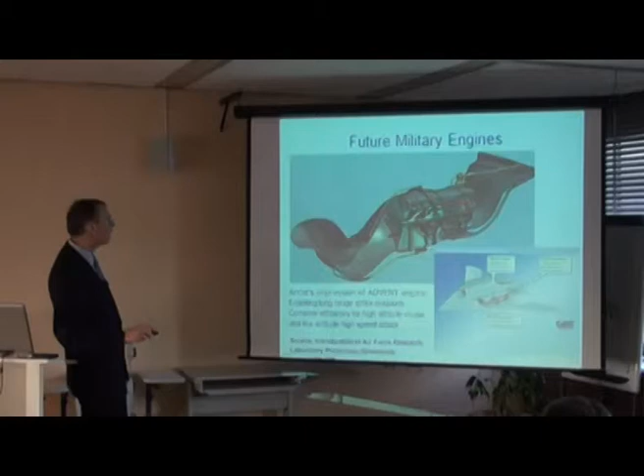Well, the current military engines have their full focus on best performance and thrust to weight. Currently, we are really running at the physical limits of those engines.

That means we have aerodynamics that's always close to separation. We have thermodynamic cycles that run close both to the thermodynamic possibilities and to material capability. You can't go any higher with current available materials.

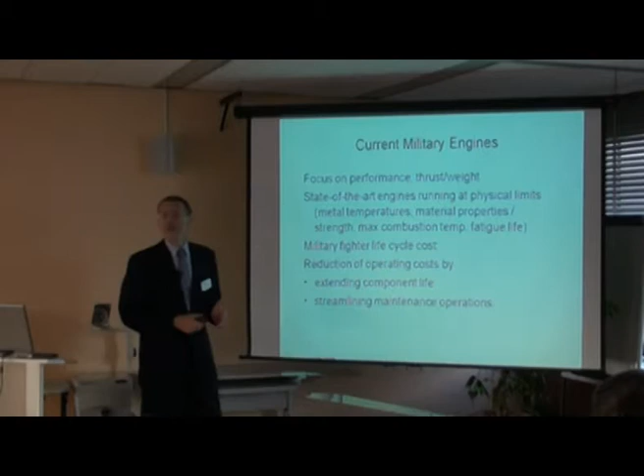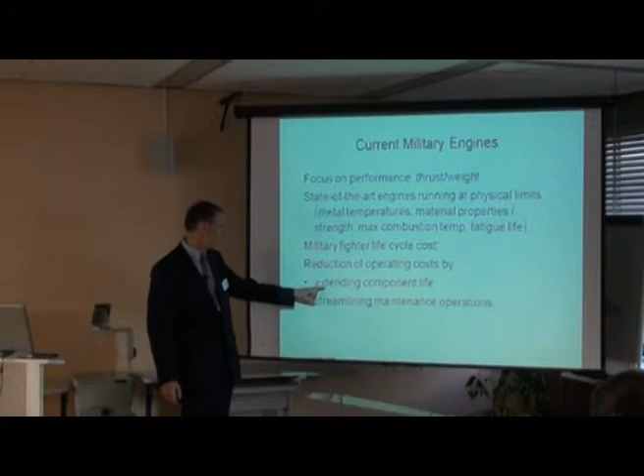Also, fatigue life is a concern. Some of the materials simply don't have sufficient life if we go to still higher temperatures. And of course, you have this concern of life cycle cost. So you want to extend component life, and you want to have maintainability with a low number of personnel.

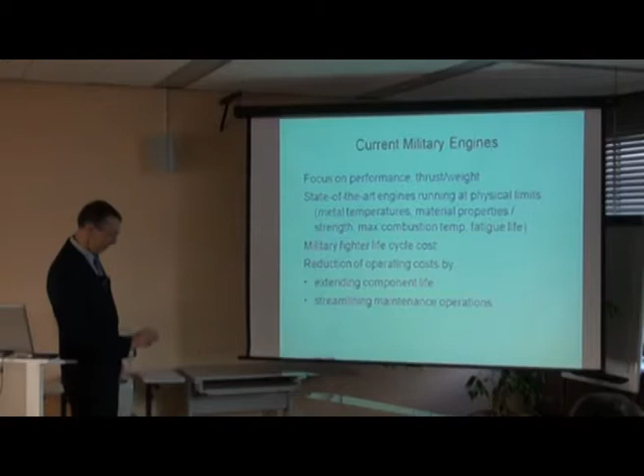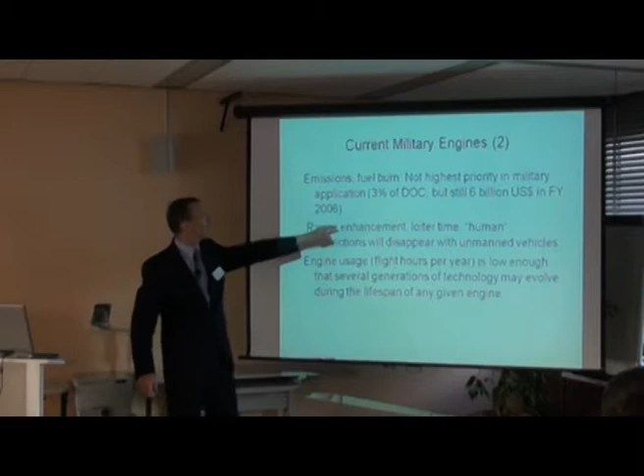Fuel burn and emissions haven't been the highest priority in past development of military engines. Just from the cost side, there are numbers for all US flight operations, including Air Force and Navy. It's only 3% of the direct operating cost, but that's still $6 billion per year. That's the fuel burn of military engines.

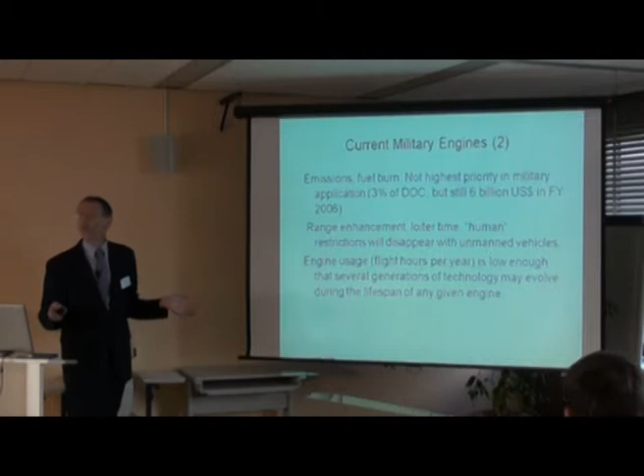And now, with the target of having something like global force projection, you want to have an aircraft, or an uninhabited aircraft, that can go everywhere in the world. And if there is no pilot in this aircraft, then all the restrictions posed by the human pilot can be removed. Your electronics have to survive, but not the pilot.

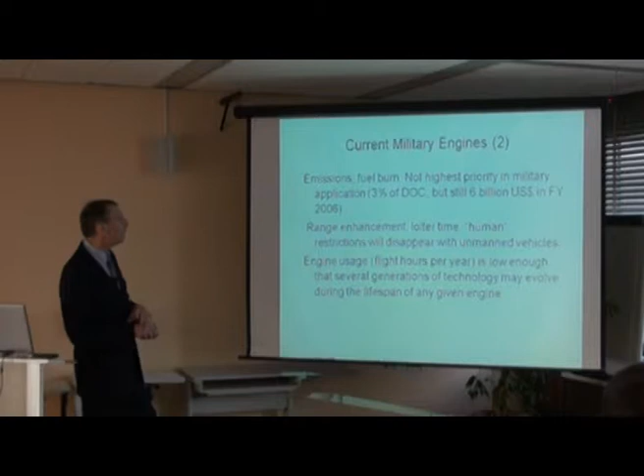And what will happen? You have this high-tech asset, but typically you will use it only a small time of the year. So the total life of the thing will go up to 40 or 50 years.

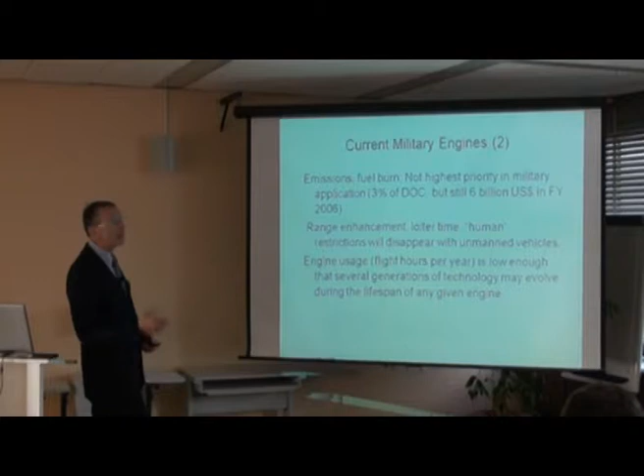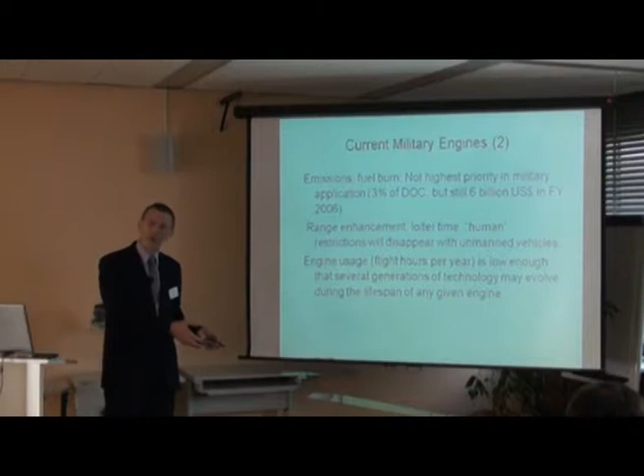And that means technology cannot be inserted at an easy path. So you have to find a technology that's upgradable somehow. There might be midlife updates in such an engine. It might be that you cannot use the latest and best technology just now, but you might consider inserting it in 10 or 20 years from now.

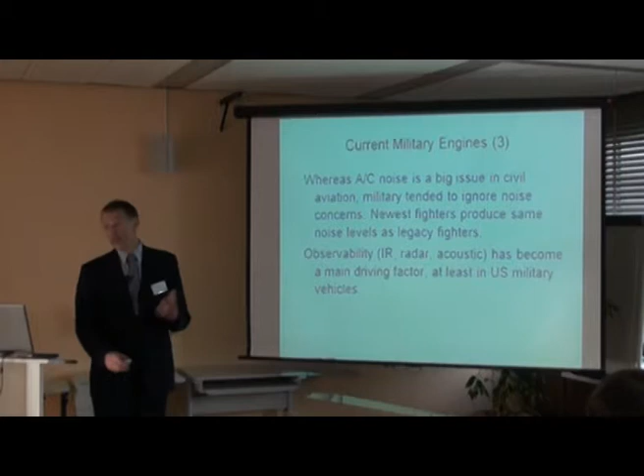Noise is the same - the military didn't put a lot of concerns on noise. They now have some concerns in aircraft carrier operation just due to the health issues of the personnel working there. But the newest fighter still has the same noise level as the ones that had been built 30 years ago.

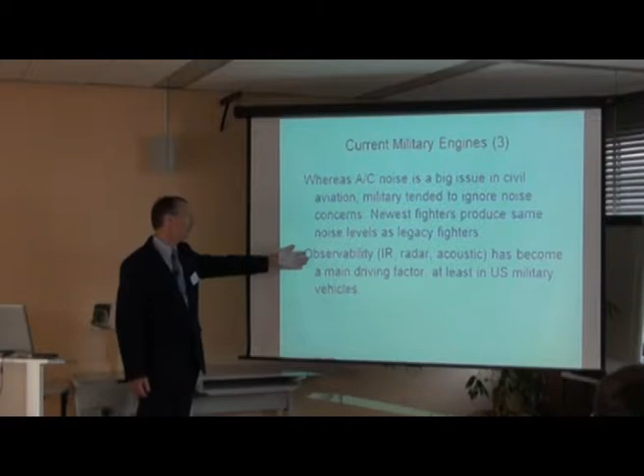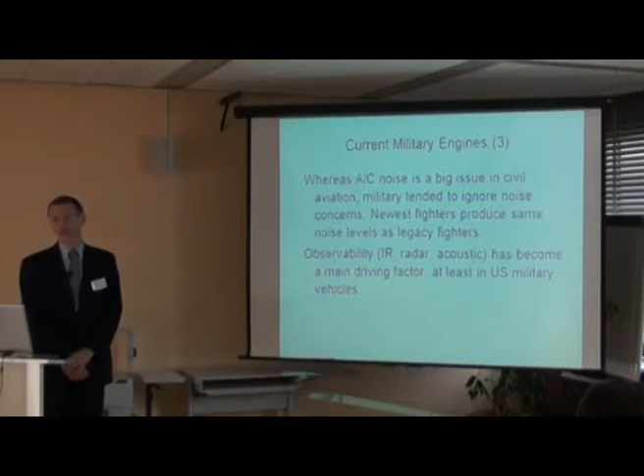And of course the observability issues - IR, radar, acoustic - had been a main driving factor in the design of the current generation of aircraft and engine, and perhaps it will continue to be. As said, if we have usage times of 40 or even 50 years, we have to find a way to handle obsolescence. In electronics, it's quite a big concern.

Of course, in a new engine, during the first years, the only thing that counts is acquisition cost. And some technologies simply might not make its way into an aircraft or into an engine because nobody wants to pay for it, or the taxpayer will not pay for it.

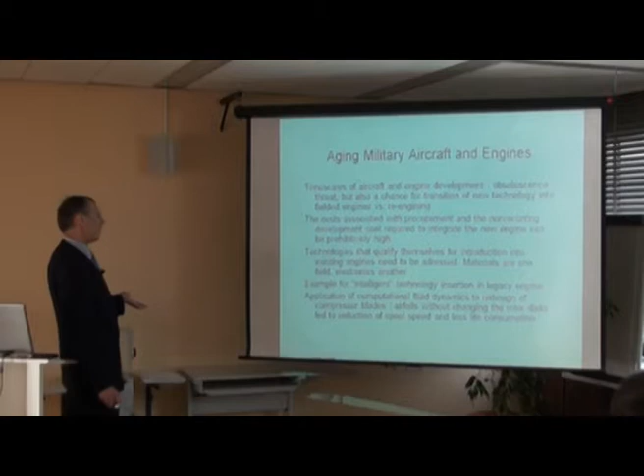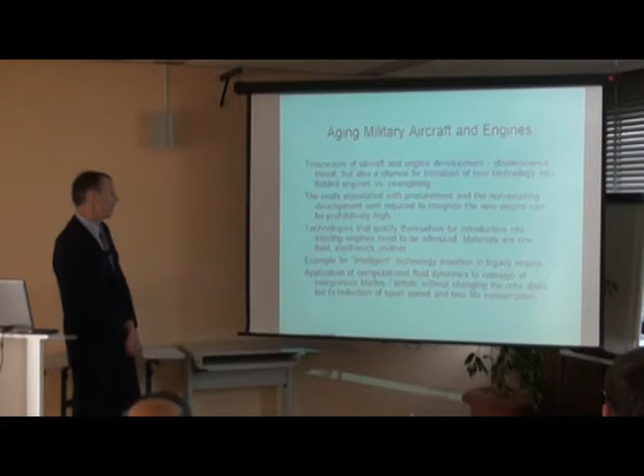Big areas where new technologies go in are materials, and electronics is another field. And we still now have research programs where we're looking at what we can do to existing engines to improve their performance and make them usable for another 10, 15, or 20 years.

I had an example where now you can redesign compressor blades that had been designed in the 1970s, and with modern fluid dynamics you can make them more efficient, produce higher pressure ratios, and even give them more life.

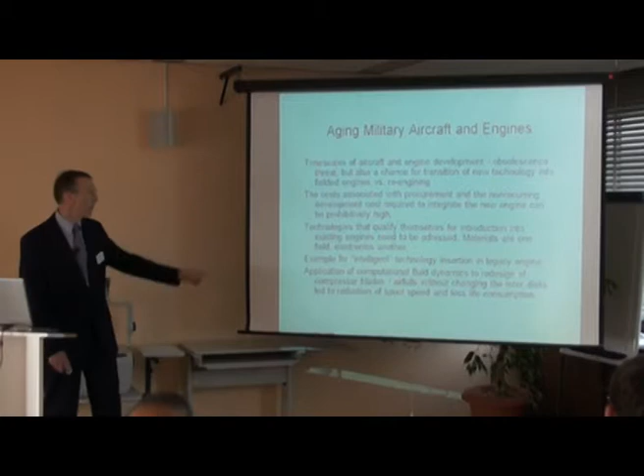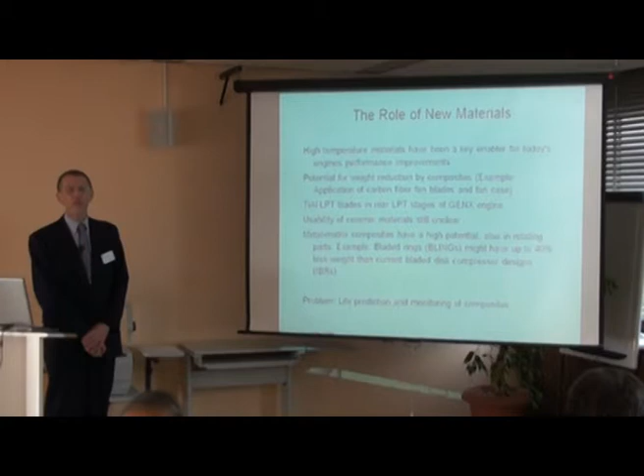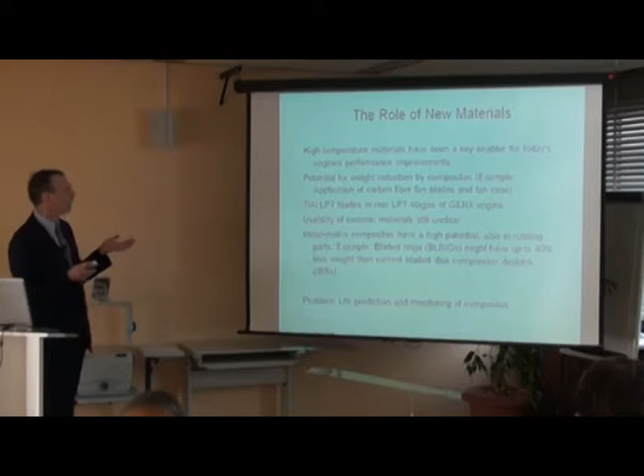New materials had been the main driver of technology in the aircraft engine business. All the new engines wouldn't exist and wouldn't be so efficient as they are now if we wouldn't have all those new materials. High temperature materials were the key enablers for today's engines.

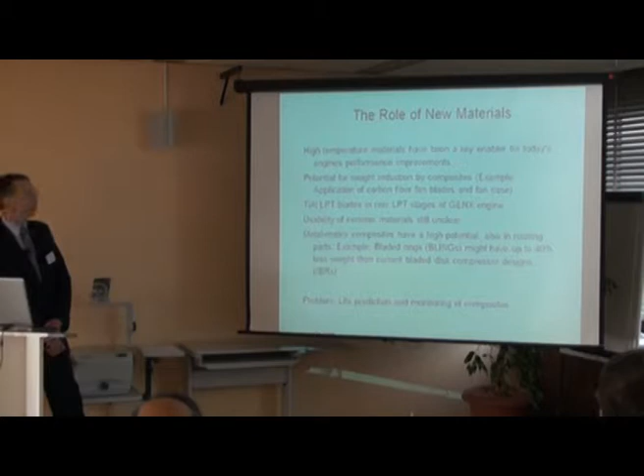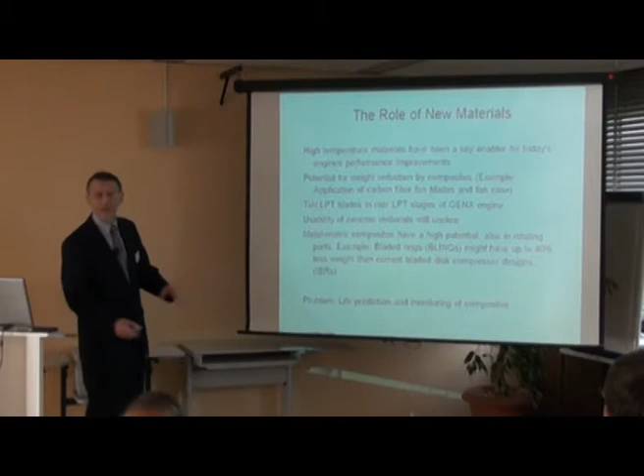There is some potential to do better, but in metallic materials, if we go for composites, in the cold part of the engines, we may have carbon fibers similar to what we now have in fuselages or in wings. There will be new metallic materials like titanium aluminide blades.

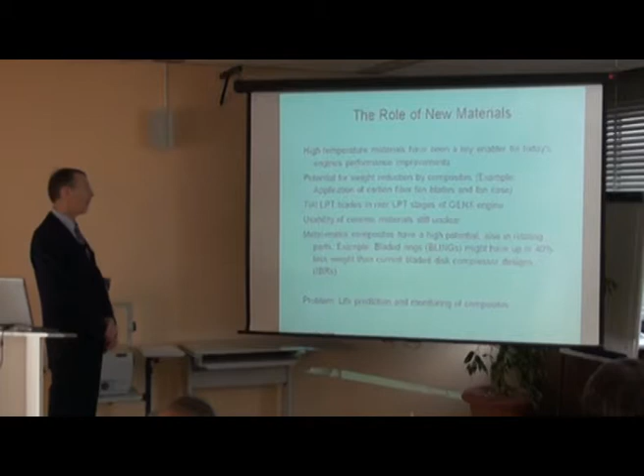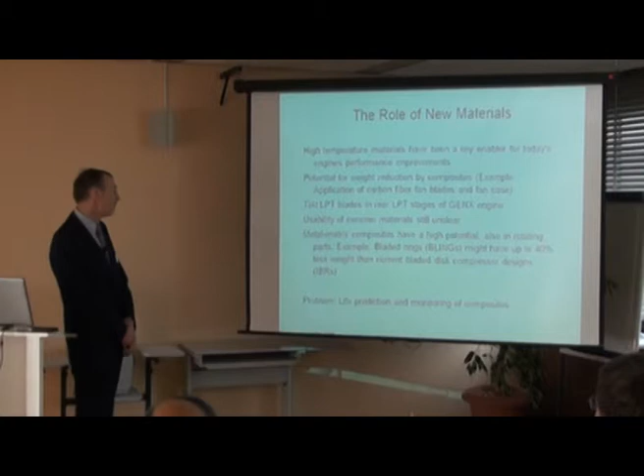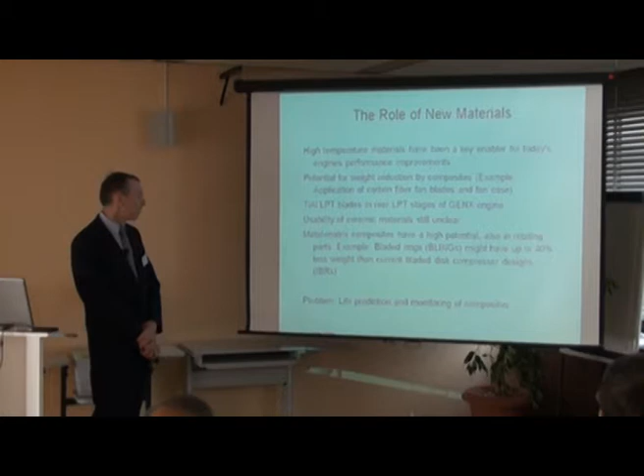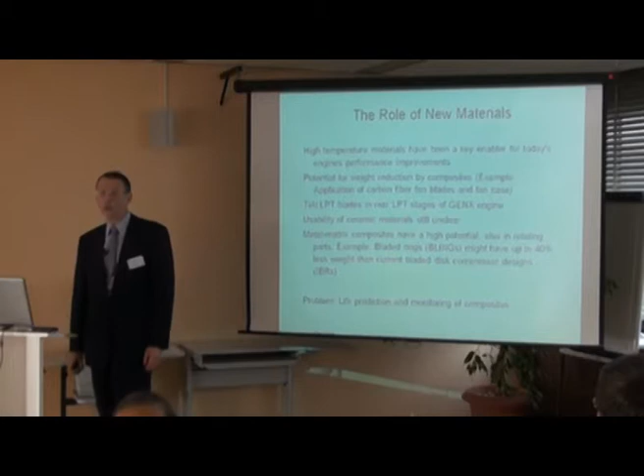Ceramic materials have been around - the idea has been around for decades, but they still didn't make it into a production engine. And we think that metal matrix composites might be one of the new enablers to have lighter weight, to have smaller engines, but there's a lot of technology research still needed. Currently, one of the main problems is it's very, very difficult to predict the life of a composite material.

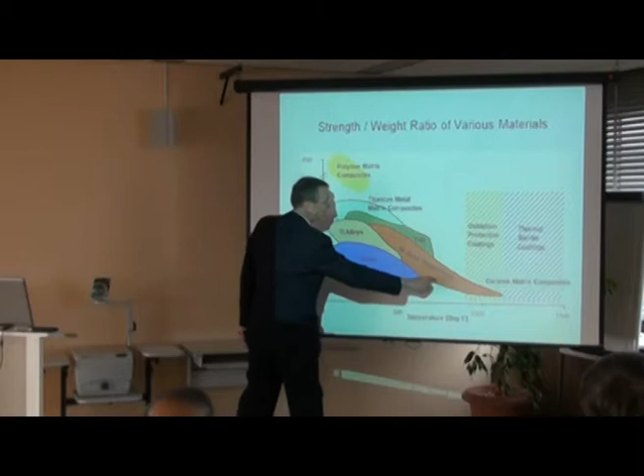Here we have the nickel-based super alloys, which are used for all the high temperature discs and turbine blades. This is the new field of titanium aluminides, which will have limited use in the rear stages of the LP turbine. And here we have this field of metal matrix composites, where there is some laboratory work and some demonstrators, but it's not yet in any existing engine.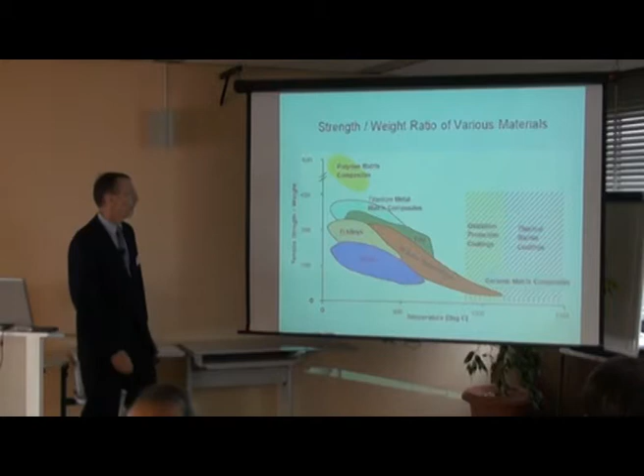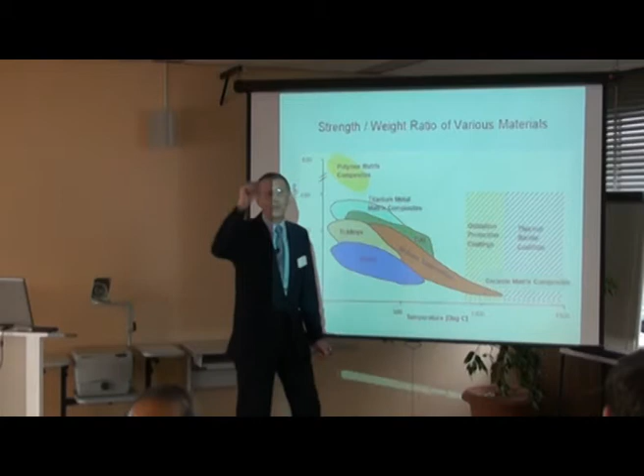And we have polymer matrix composites, which could be used in the front stages, in the fan. And here you have special things like thermal barrier coatings or oxidation protection coatings, which can be made in thin layers but not as a bulk material.

Okay, I highly recommend you have a look at the European technology programs. There is a lot of material on websites. I can give you the links. I think they are also included somewhere in the material.

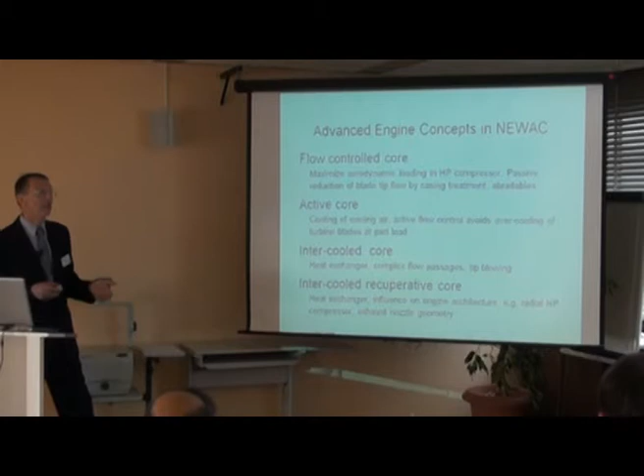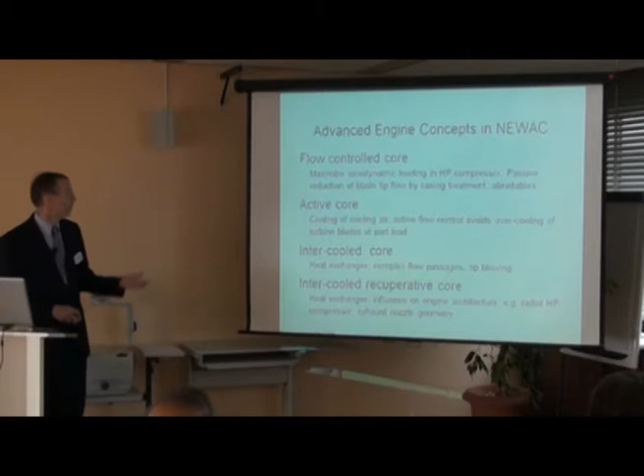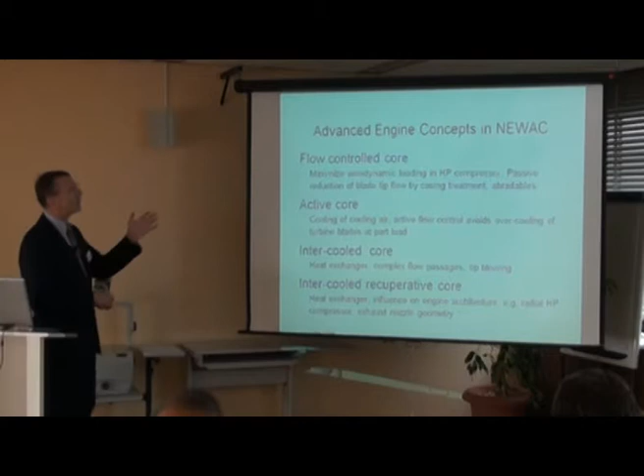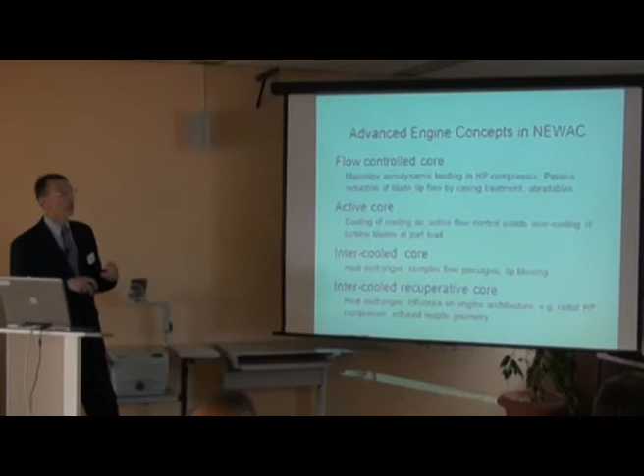There we have to really try to do something that's innovative, going beyond what is currently in the market. Things like the flow control core, which has active elements in the compressor, or something passive by treating the casings, using new abradables. Active core is something Wolfgang will talk about, I think.

And of course, if we want to go beyond the performance we can reach with current engines, we have to do something on the thermodynamic cycle. That means the flow of heat in the engine, in the process, has to be changed, and heat exchangers might be used. This will involve very complicated flow passages, and a lot of new concerns, both from structural and aerodynamics viewpoints.

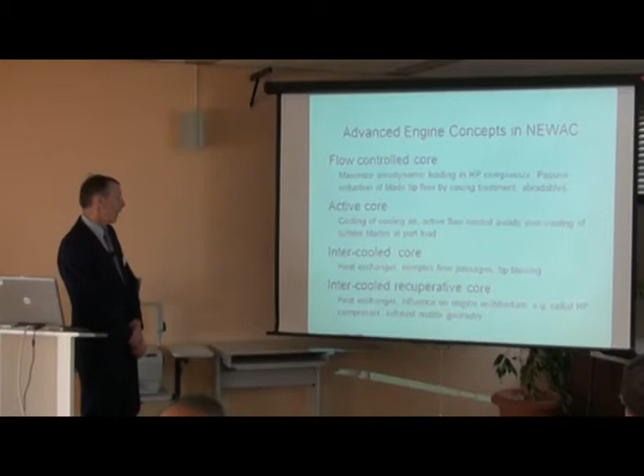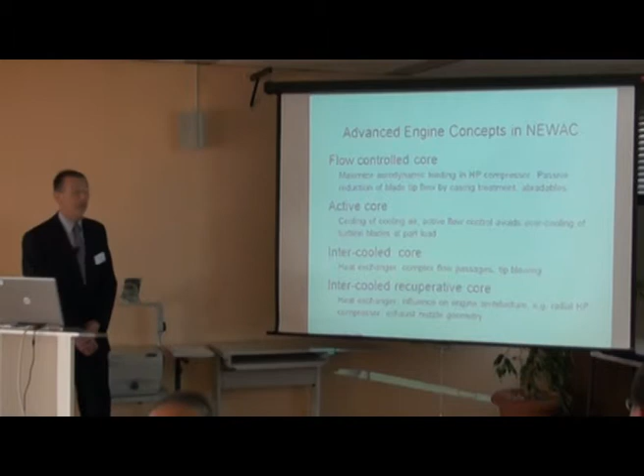And eventually you could think about getting some heat back from the exhaust. That would be an engine that has a heat exchanger in the exhaust, which would give you a big performance benefit, but of course it will add a lot of additional weight, and it will be a complex geometry. I'm looking forward to it, but it may take some time.

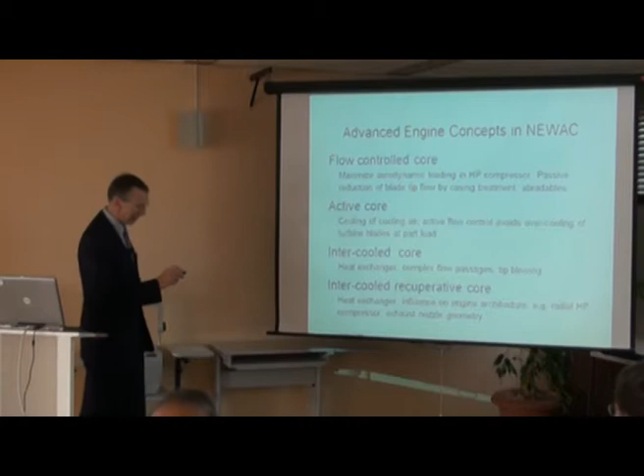That just gives the idea of what we can reach with new engine cycles. The conventional engine cycle, as Sanjay mentioned, has two compressors and two shafts that are connected. We add energy here in the combustion chamber, and we drive the two turbines, and they have an exhaust in the rear.

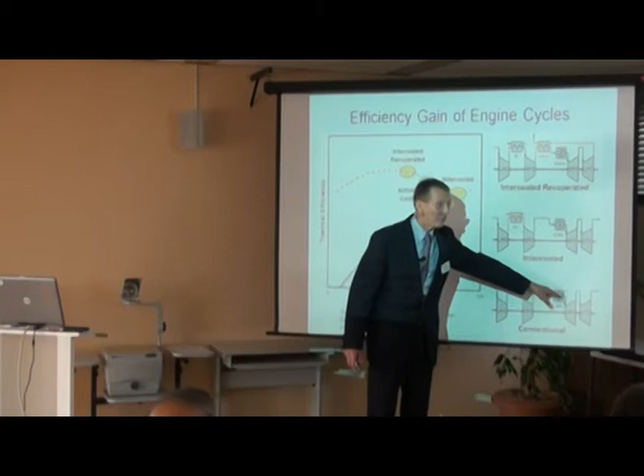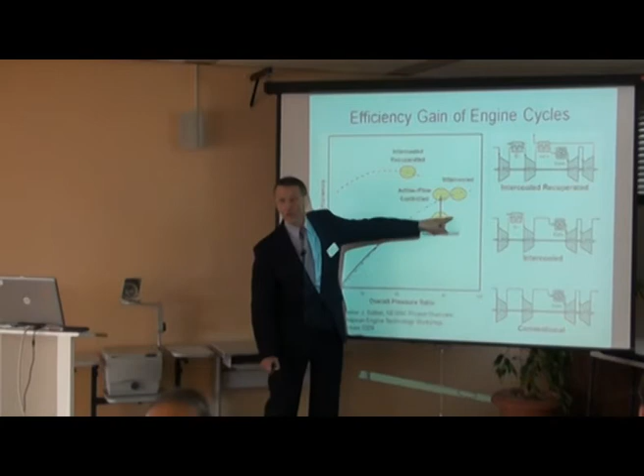The problem basically is that a lot of heat you put in here is lost at the exhaust. You produce a lot of thermal energy that just heats the surrounding air. And if you want to increase temperature, we're running into some saturation now with conventional engines.

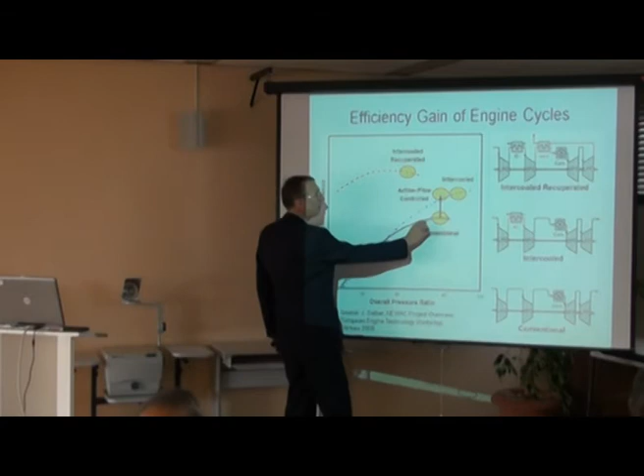If you go up with bypass ratios, if you go up with core pressure ratios, then, as Wolfgang will talk about, you increase the ratio of gaps and the aerodynamic losses, and stability will simply put limits here. So if you go to a pressure ratio of 60, perhaps your losses will eat up all your benefit. Or if you go to still higher turbine inlet temperatures, the cooling needed for the material will eat up all the benefit of the new thermodynamic cycle.

And so if you want to lower the temperature in the combustor, then you need to bring down the temperature level, and that could be done by cooling in the compressor. Between the LP compressor and the HP compressor, if you cool this air, then you can go down with temperature in the turbine, and your blades will survive at a higher pressure but at lower temperature.

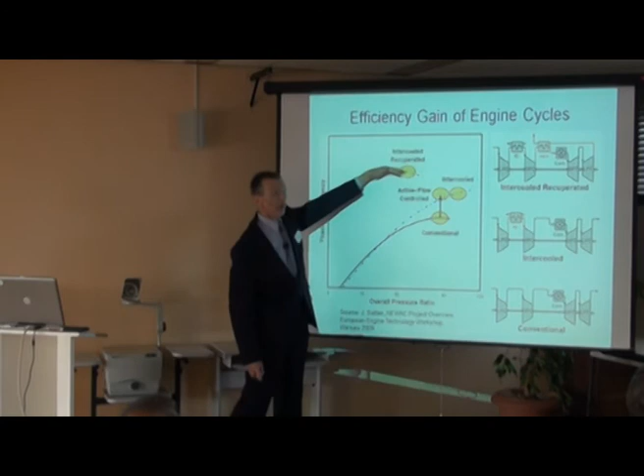And the total game changer would be something where you have heat exchangers that put heat back in from the exhaust. That would be a totally new concept, but as said, it's a complicated architecture, and I'm wondering if I will see it in the next 10 years or so.

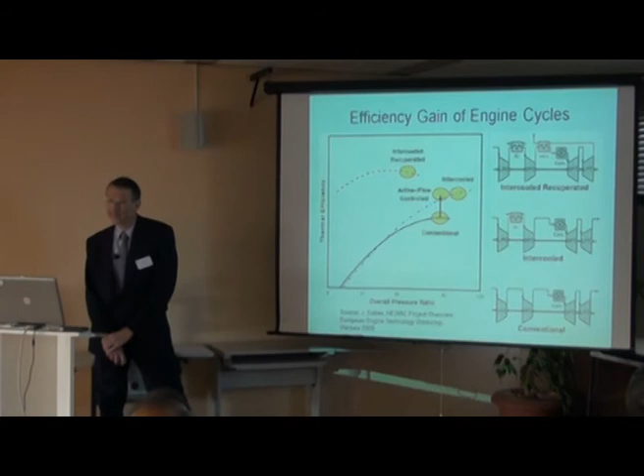Well, these are a few of the concepts being considered now in the European research program. Something like an active core, where we try to influence the flow in the compressor, stabilize the flow in the compressor, and avoid losses by reducing the gap.

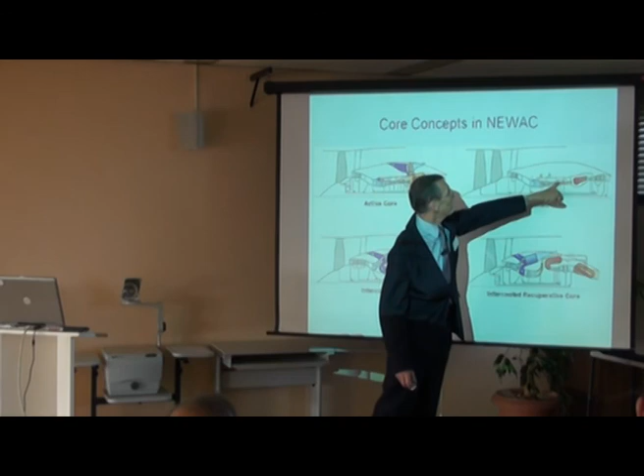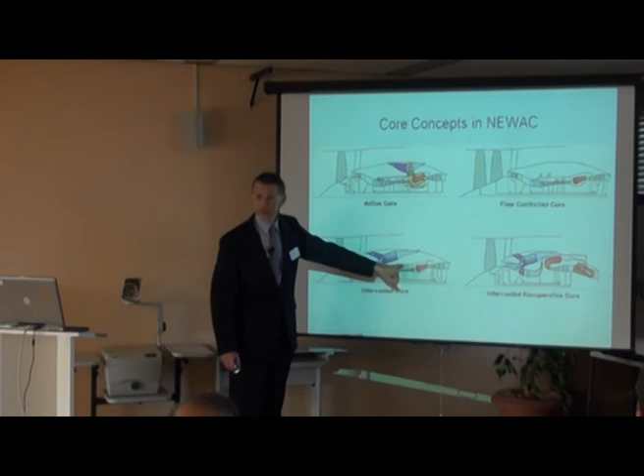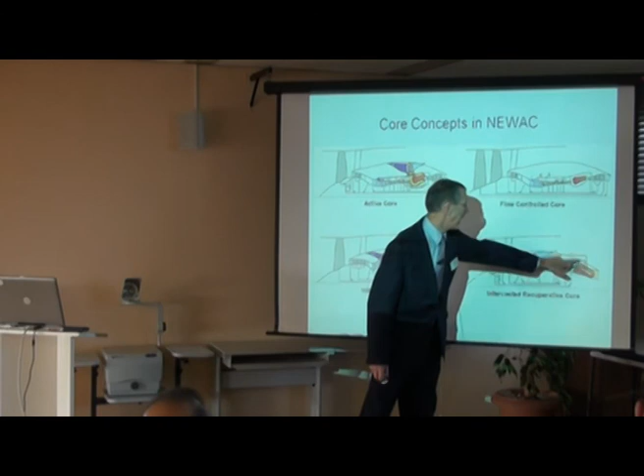You can also go to still higher compression ratios through other flow stabilization techniques, and the radically new concepts would involve intercooling between the LP compressor and the HP compressor, or the most radical concept would really be to combine everything, having intercooling here, and feedback of the exhaust temperature to the compressor flow.